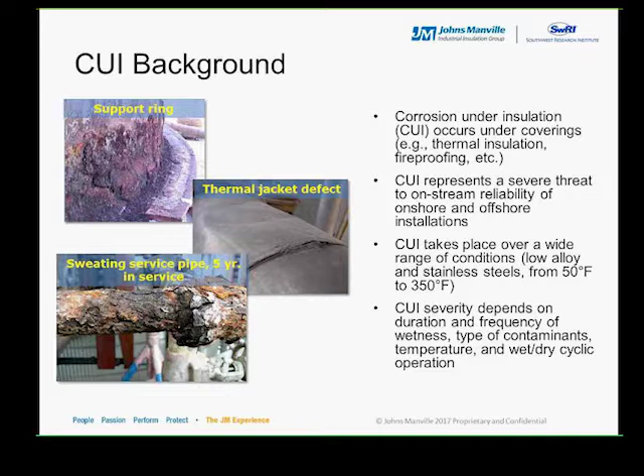Variables in CUI processes. There are a great number of variables associated with CUI processes. Examples of these variables include moisture, oxygen availability, metal temperature, type of CUI preventing coatings, and insulations. There can be various contaminants on the surface of the jacketing, and these contaminants can be picked up and carried into the insulation when water enters the system.

Chloride concentrations less than 10 parts per million are enough to cause stress corrosion cracking in stainless steel pipes operating above 140 degrees Fahrenheit. Pipes which operate at the range of CUI temperatures can have repeated cycles of condensation and re-evaporation, resulting in a more aggressive form of corrosion.

With these slides, I want to emphasize that the CUI scenario is pretty complex. The great number of variables may have a synergistic effect on the development of CUI. That is why CUI has to be viewed as a system approach, as mentioned in numerous standard practices and guidance documents.

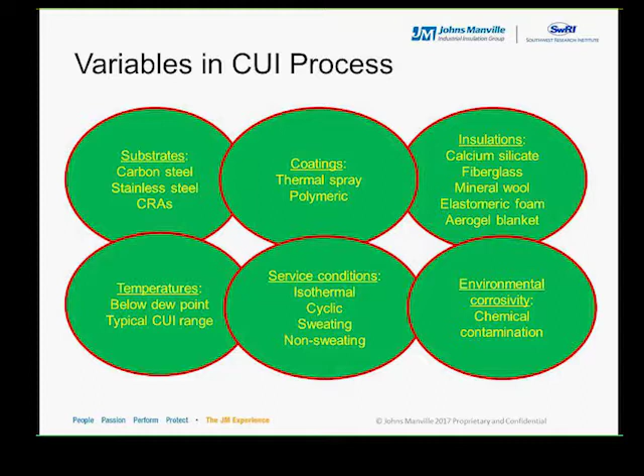The mechanism of CUI is initiated by the ingress of external solution into the thermal insulation, which traps the solution at the annular space between the metal surface and the insulation.

Just for the record, the true cause of CUI is due to long durations of contact with wet insulation, not just the lack of proper coating, for instance. We cannot rely on a coating to be the ultimate answer for CUI prevention. We have to rely on the knowledge that what really causes CUI is long-term water contact, so careful design and material selections are important in mitigating CUI.

Impact and cost of CUI.

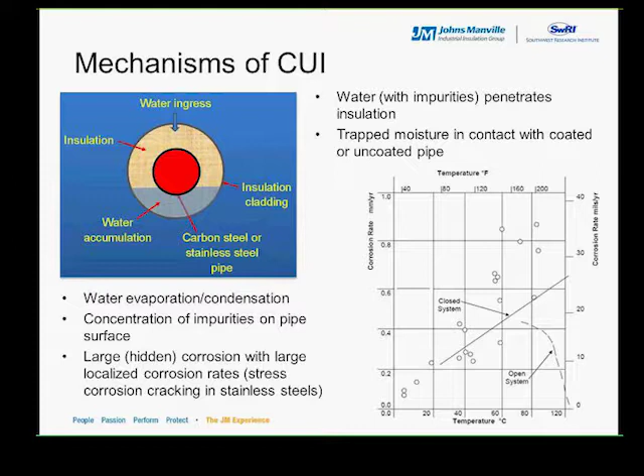A NACE study back in 2002 estimates that the annual cost of corrosion in production manufacturing in the United States to be around $17.6 billion, out of which 34%, or about $6 billion, is associated with the pulp and paper industries, and 40%, or $6.8 billion, is related to the oil and gas industries.

According to a study presented to the European Federation of Corrosion, the following conclusions were extracted from that investigation. The highest incidence of leaks in refining and chemical industries are due to CUI and not to process corrosion. Over 80% of most piping leaks occurs in diameter less than 4 inches.

Between 40 and 60% of piping maintenance costs are related to CUI, according to the Exxon study back in 2003. And last, CUI is associated with the most lengthy refinery downtimes.

As such, this type of corrosion can be serious problems and even catastrophic consequences in areas that are not normally of a primary concern to an inspection program, causing adverse economic losses in terms of downtime and repairs.

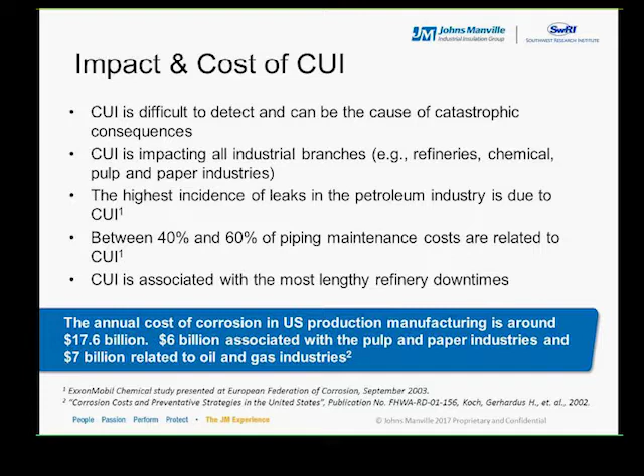Need for CUI testing.

The current standards related to CUI are either difficult to use or in many cases lack of relevancy. Coating and insulation vendors started to use internal test methods to evaluate CUI performance at elevated temperatures.

The main issue with those tests is that in some cases the test method is so aggressive that systems which have performed in the field for years suddenly look really bad in the lab and vice versa.

The NACE SP0198 document offers a true view of CUI mechanisms, as well as directions on coating systems and the limitations of certain coating technologies.

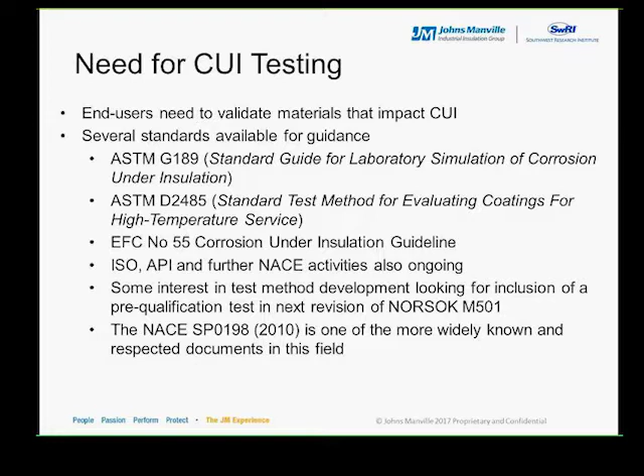Available CUI test protocols.

Experience has shown that performance-based qualification of coatings and insulations are more effective at raising performance rather than compositional standards.

The majority of the CUI test methods are not field validated, plus there are either some geometrical issues of the test specimens or temperature limitations, in addition to the lack of insulation in the tests. All that may pose real problems when it comes to mimic CUI in the laboratory.

Recently, ExxonMobil partnered with Southwest Research Institute to develop a test method to better assess CUI. The resulting test method reproduced field observations very well in terms of coating performance and corrosion rate of bare metals.

One of the main benefits of the test protocol is that it is not a pass-fail type approach. Instead, this test protocol is to be used as a means of establishing the relative performance of coatings and insulations given a set test criteria.

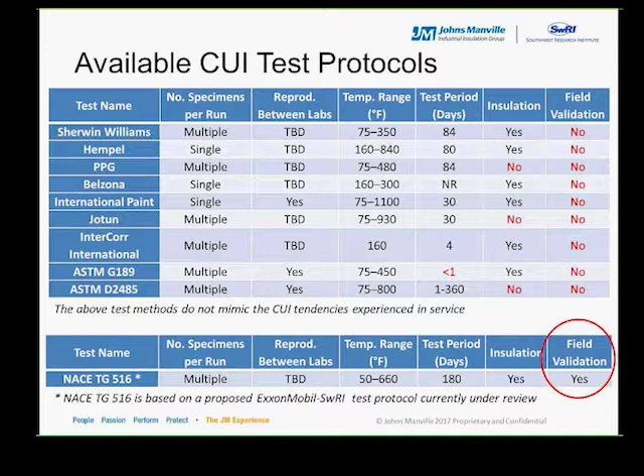The test method allows for various CUI environments that ranges from isothermal to cyclic operations. I will explain the developed test approach more in detail later on, and I will refer this test method as the NACE TG516.

Next, I'm going to address the NACE TG516 test protocol for CUI evaluation. The design of the test method is based on an approach that simulates CUI field conditions under any type of insulation material and coating type.

Another great benefit of this test method is that it allows for real-time electrochemical measurements that determine the corrosion rate of the metal, as well as the onset of coating degradation. This is very important in assessing the performance-based conditions of a system under evaluation.

The test duration is typically set to 26 weeks or until coating failures occur, whichever comes first.

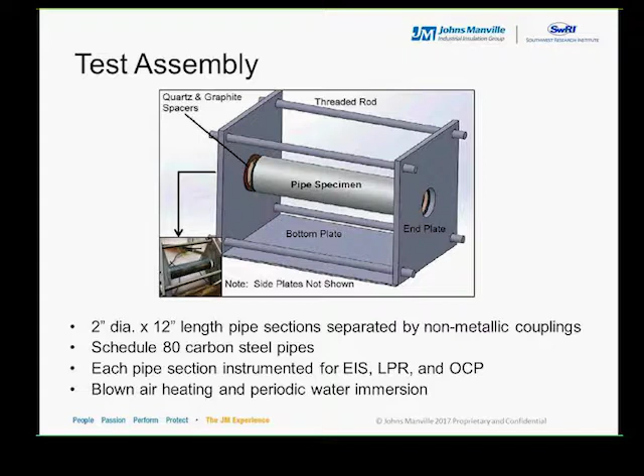Low temperature condition. For the low temperature condition, inline pipe spools interconnected with isolation couplings are used. The couplings are used to electrically isolate each of the pipe spools with the purpose of executing the electrochemical measurements. The gap between the couplings and the pipe surface are sealed with silicone to prevent water ingress inside the pipe.

Then the pipe spools are insulated with a given thermal insulation wrapped with a metal sheeting following field insulation practices. To attain low temperatures, cold air source is fed on the inside of the pipe using a vortex tube placed on the inlet of the pipe spool. A solenoid valve is installed upstream of the vortex tube to control the airflow.

Replacing the cold air by hot air at the source, this test setup can be used to model CUI in the temperature range between 50 degrees Fahrenheit up to 660 degrees Fahrenheit. During this setup, chlorides or other contaminants can be added to determine the effect of these contaminants. Wet-dry cycles are repeated for the duration of the test to accelerate the occurrence of CUI.

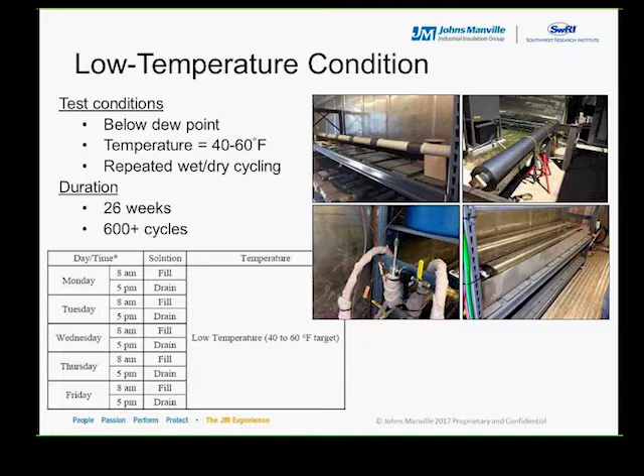Cyclic sweating condition. This test apparatus is designed for test temperatures ranging from 40 degrees Fahrenheit to 800 degrees Fahrenheit. This test method uses individual pipe spools that are placed in an individual vessel.

A thermal heater rod is placed inside along the inside diameter of the pipe spools to irradiate heat to the inner surface of the pipe spools. The heater rod is placed through connection ports to make sure that the heater is centrally located alongside the pipe.

Incoming air can be used instead of a heated rod, but there's a maximum temperature limit with the use of blown hot air inside. The measurement sequence, additions of contaminants, and time of exposures is comparable to that of the low temperature condition. Again, wet, dry, and hot-cold cycles are used to accelerate the occurrence of CUI.

For this test setup, the pipe spool is sandwiched between two metal plates using threaded rods. Quartz and graphite spacers are placed at both ends of the pipe to electrically isolate the pipe from the metal enclosure.

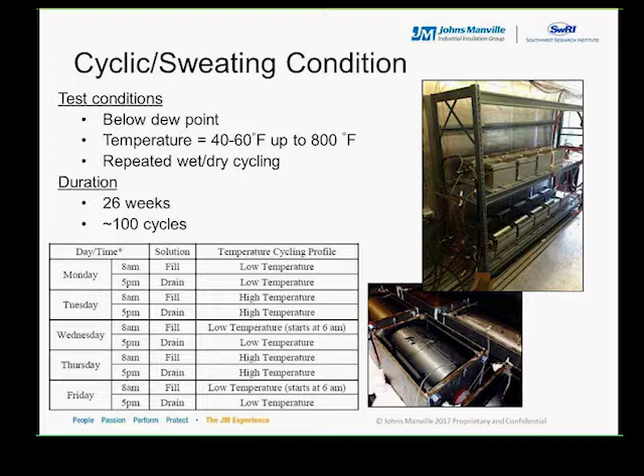Analysis techniques. For the in-situ electrochemical measurements, a reference electrode is placed outside the jacket in contact with the external solution. The metal jacket is used as a counter electrode. Typical electrochemical measurements include open circuit potentials, linear polarization resistance, and electrochemical impedance spectroscopy.

These techniques have been successful in tracking corrosion rates and coating integrity under insulation in real time. For the electrochemical impedance spectroscopy, equivalent circuits are used to model the physical behavior of the CUI process.

Other analysis methods are conducted after the removal of the insulation after a CUI exposure. Visual observation, ultrasonic measurements, and optical microscopy are used to determine the surface condition, and the result can be compared to those of the electrochemical measurements.

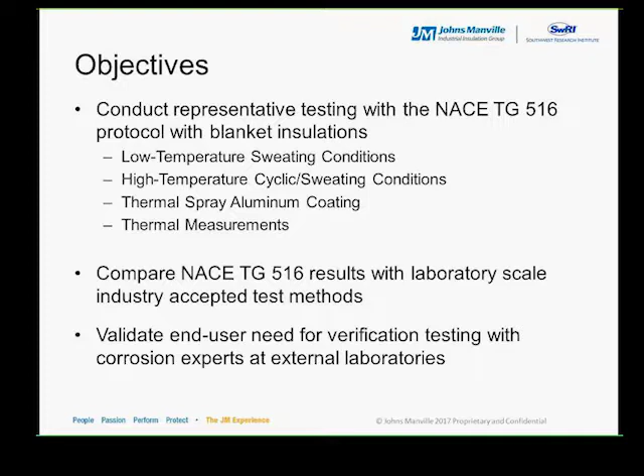Finally, the main objective is to really provide our customers and the industry the information they need to make decisions. Again, we want to provide our data so customers can actually use it and relate to it, and not just have it be another data point that may or may not be relevant to their application.

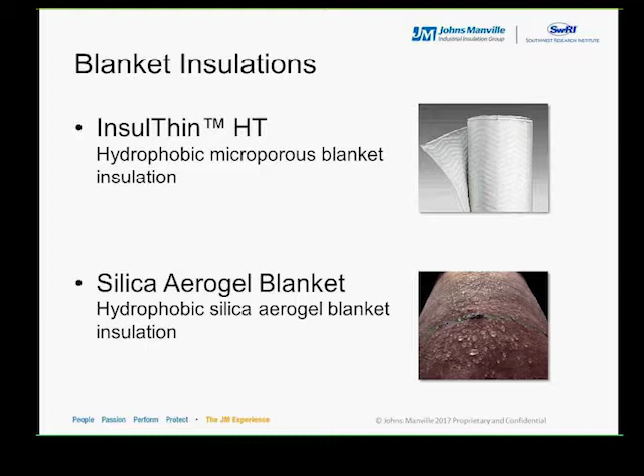So for the following study, we focused on two blanket insulations. First is a microporous blanket that JM launched in 2014, Insulthin HT, and the second is a silica aerogel blanket currently available in the market. Both are blankets and both are hydrophobic, so we and the people we consulted felt that these products were a good comparison for what was going to be JM's first study of this test protocol.

To begin, and so everybody's clear on the details of the conditions tested, the first set of data I'm going to talk about is what Leo referred to as the low temperature conditions. This profile kept the pipe between 40 and 60 degrees Fahrenheit during the entire 6-month test protocol.

In this manner, the insulation and assembly remained wet the entire time. Each day, the sample setups were filled with water in the morning and then drained at night. One thing that's really important to point out is that for the first 2 months, tap water was used to fill the chamber, as can be seen in the top right picture, and in the last 4 months, a 1500 ppm chloride solution was used to further accelerate the condition of corrosion under insulation.

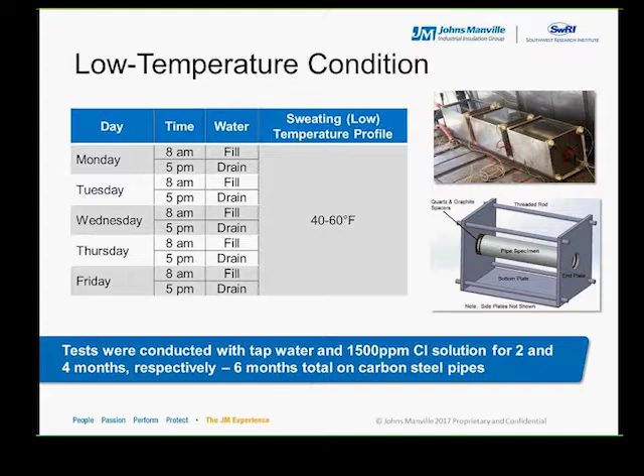This first slide shows results from the electrochemical method that Leo described earlier, under the low temperature sweating conditions. SwRI calculated the mean corrosion rates in situ throughout the 6-month timeframe for each insulation, and they're shown in the table on the bottom of the slide. The pictures taken by SwRI after the insulation was removed from the carbon steel specimens are also shown in the top portion of the slide.

The carbon steel pipe specimens were pressure washed to remove most of the corrosion byproducts, and you can see that both pipe sections look very similar with some corrosion-affected areas, but otherwise the sections look fairly uniform. Keep in mind that the pictures are representative of the carbon steel pipes after exposure to both the 2 months of tap water and the 4 months of 1500 ppm chloride.

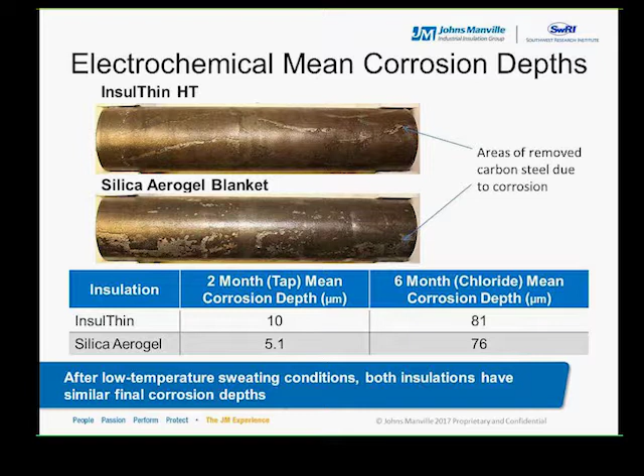So looking at the data table, the electrochemical test methods confirm that the mean corrosion depths for each insulation were very similar. Based on SwRI's historical data and expertise, the depths were statistically the same for both insulations at the two different time periods.

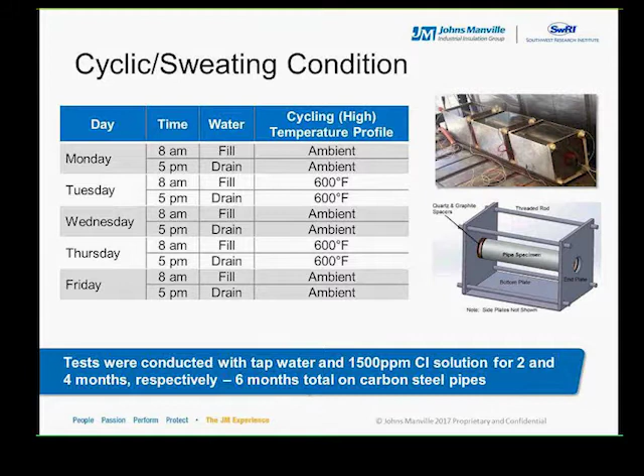Next we wanted to describe the impact of cyclic and sweating conditions on the two insulation assemblies: one with Insulthin and the other with the silica aerogel blanket. Here the same filling and draining of water was conducted, but now a 600-degree Fahrenheit condition was introduced. Each week, two cycles of high temperature conditions were exposed to the samples. So there were times when the assemblies were actually dry, unlike the sweating condition when it is wet the entire 6-month time frame. What we're mimicking with the cyclic test is repeated cycles of startups and shutdowns in field conditions.

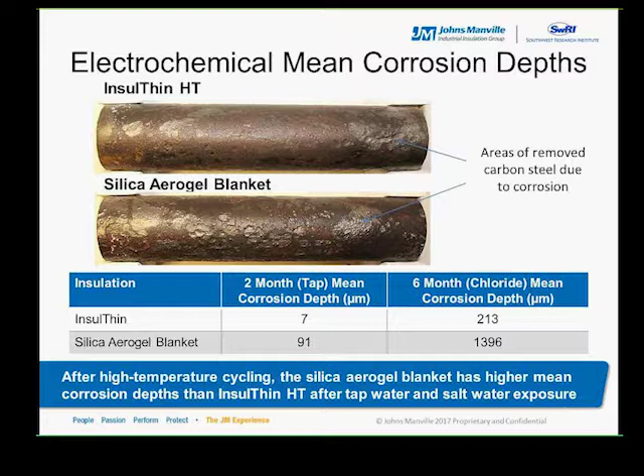If we look at the samples using the ultrasonic method, the same conclusions can be made, which is comforting since both methods show the same results. If we do the math again, in the third column we see that the maximum pitting depth of the Insulthin sample is lower than the silica aerogel blanket. What this means is that the Insulthin sample has more metal remaining after the test period.

Taking it a step further, this really shows that not only is the mean corrosion depth higher for the silica aerogel blanket, as calculated by the electrochemical method, but more importantly, the ultrasonic method can really see the presence of critical deep pitting that can lead to failures. It's really these localized pits that are the areas of most concern because they're harder to detect and usually where the failures occur.

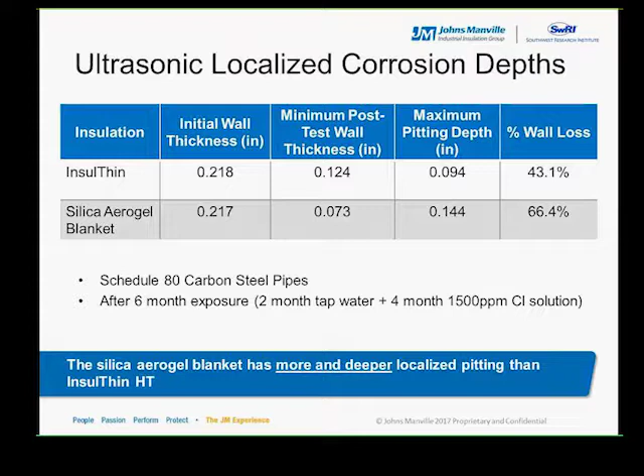SwRI also took some cross-sections and analyzed the pipe samples using optical microscopy. Again, the presence of deep corrosion pits was more evident in the silica aerogel blanket than the Insulthin HT. In the microscopy images on the slide, you can see the dark areas where the blue arrows point, showing the presence of pits in the pictures. Though both insulation samples show corrosion pits of varying depths, the silica aerogel blankets were clearly much deeper and wider than the Insulthin samples at the various points we looked at.

So this is the third piece of data that really confirms that the silica aerogel blanket has deeper pits at the accelerated sweating and cyclic high temperature conditions.

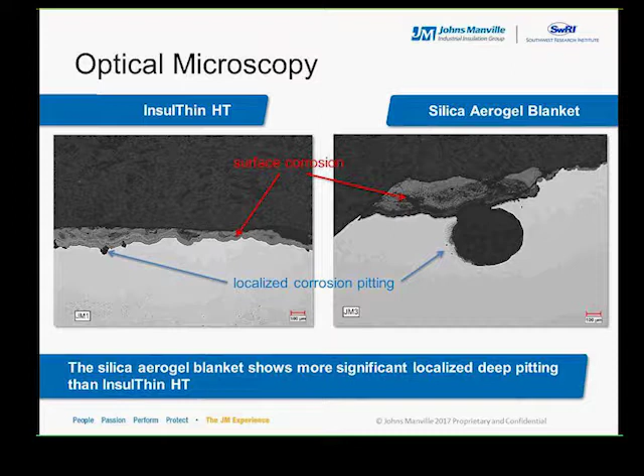The second objective of our study was to compare the results of the NACE TG516 test protocol with the accepted ASTM methods that we've used for evaluating corrosion in the past, in particular ASTM C665, which has been around for decades, and the newer C1617 test method that was developed and has been used over the last 5+ years.

The C665 test method is more qualitative in nature and compares the amount of corrosion using a visual inspection after sandwiching a piece of carbon steel between two insulation pieces and exposing it to about 90 degrees Fahrenheit and 90% humidity for 96 hours.

C1617, on the other hand, uses a quantitative process and compares the mass loss when a leachate solution made from the insulations is dripped onto a carbon steel coupon and dried repeatedly, again for about 96 hours.

Very encouragingly, the results of both ASTM test methods agree with what we've seen in the NACE TG516 protocol. The silica aerogel blanket has more visible corrosion products on the surface compared to the Insulthin HT sample using ASTM C665, and the mass loss corrosion rate in C1617 is 4 times higher in the silica aerogel blanket compared to the Insulthin.

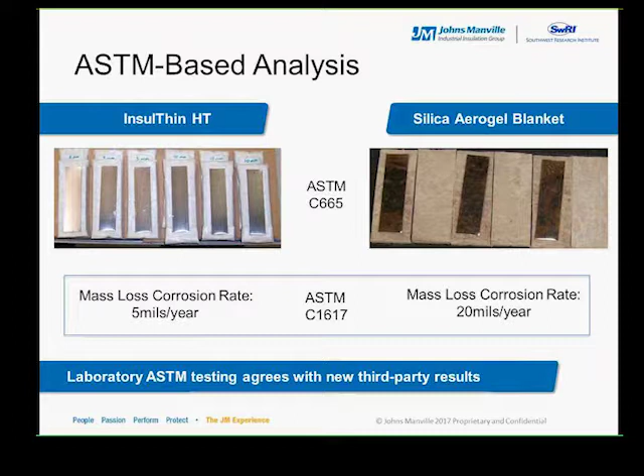The last corrosion-based analysis we conducted compared the impact of TSA, or thermal spray aluminum coatings, using the NACE TG516 test protocol. We only looked at this with Insulthin that was coated with TSA before installing the insulation, not the silica aerogel blanket.

In the bottom left-hand corner picture you can see a nice TSA coating on a section of pipe from a sample of the tested specimen.

The table shown in this slide is split to show results of both environmental conditions, the cold sweating and the hot cyclic. Also shown is a comparison between the mean corrosion depth with and without the TSA coating after both the 2-month exposure to tap water and the 4-month exposure to 1500 ppm chloride.

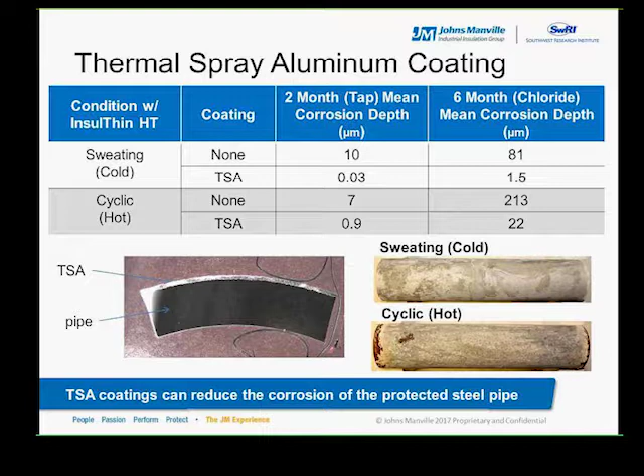In all conditions, the TSA decreases the mean corrosion depth by at least an order of magnitude, which isn't surprising since that's what TSA is supposed to do. But it's also an example of how this test method can be used to explore the impact of not only insulations, as we did earlier in the study, but also coatings in full insulation systems.

Switching now to the impact of real-world accelerated corrosion conditions on insulation thermal performance, we evaluated the thermal performance of both insulations at different times. You can see in this table that we looked at 1 week, 3 months, and 6 months. We did this by placing a thermocouple at the outside of the sheathing in the high temperature cyclic assembly and measuring the temperatures when the pipe was at its 600-degree time cycle.

Throughout the test period, the InsulThin blanket provides more insulating value compared to the silica aerogel blanket, which is expected based on the theoretical thermal conductivity values and test conditions as calculated by NAIMA's 3E Plus program, shown on the far right side of the table for each insulation blanket. However, the interesting thing is the silica aerogel blanket shows thermal degradation performance over time that's more accelerated than the InsulThin blanket.

For example, at the 1 week mark, the temperature difference is 19 degrees Fahrenheit between the two insulations: 177 for the aerogel and 158 for the InsulThin. But after the 6-month test period, the difference increased to 27 degrees Fahrenheit: 191 for the aerogel and 164 for the InsulThin.

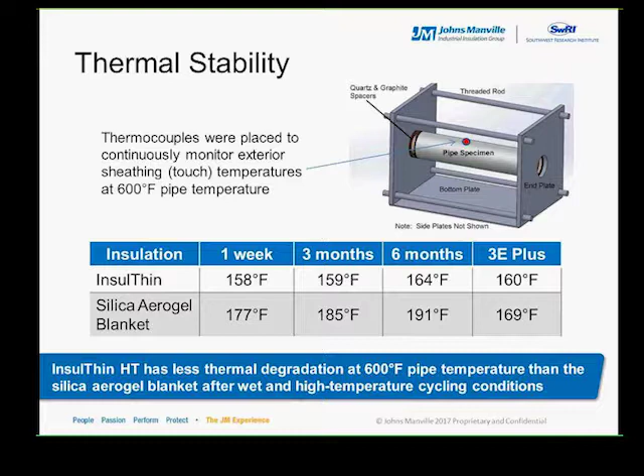In addition, the temperature difference between the actual and theoretical expected values increased for the aerogel from 8 degrees to 22 degrees over the 6-month timeframe, while the increase was only 4 degrees for the Insulthin HT.

To address some of the thermal degradation differences just presented between the two different blanket installations, we reviewed thermal conductivity data produced by a third party using ASTM C335, which uses a round geometry as opposed to flat. It's important to note that round geometry thermal conductivity data is much more representative for pipes, and this is what we used here compared to the flat thermal conductivity data.

The data shows that some of the thermal degradation seen in the previous slide can be partially explained by a thermal shift phenomenon we've seen with silica aerogel blankets, but not with micropore-based blankets like Insulthin. To briefly summarize, exposing silica aerogels to high temperatures results in degradation of the aerogel structure and therefore its thermal performance.

This can be seen in the difference between the two lines in the graph comparing the first and second cycles. The first cycle is data from virgin product not exposed to heat, and the second cycle is a repeat of the same material exposed to a mean temperature of about 700 degrees Fahrenheit. The first and second cycle lines are right on top of each other for the InsulThin, meaning temperature does not really affect thermal performance, but with the aerogel you can see 20 to 30% higher values on the second cycle compared to the first.

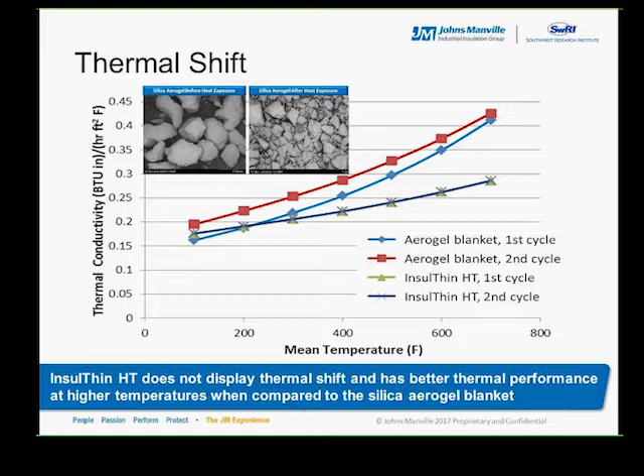So the thermal shift can explain part of the difference between the thermal test data shown in the previous slide, but we also know that the presence of water can affect the thermal performance to varying degrees of most insulation materials.

So to summarize, the conclusions from this third-party study completed by SwRI are the following. First, at low temperature sweating conditions, InsulThin HT and silica aerogels have similar corrosion rates and depths, and this was seen in both the electrochemical and ultrasonic test methods.

At high temperature cycling conditions, InsulThin has a lower corrosion rate and depth compared to silica aerogels, and more importantly, the silica aerogel causes deeper localized pitting, which is very significant from a failure analysis standpoint compared to uniform surface corrosion.

Third, our analysis of a TSA coating showed it can reduce the amount of corrosion, and that this NACE test method we just reviewed can be used not only for looking at insulation materials but also coatings.

Fourth, based on add-on testing we did to complete the understanding of the thermal performance of the two different insulations after corrosion, with accelerated corrosion conditions, we confirmed the presence of a thermal shift with the silica aerogel blanket, but not the InsulThin, at the wet and high temperature exposures.

And finally, from an insulation manufacturer standpoint, one of the important learnings for us from this study was the conclusion that there's pretty good correlation between the laboratory scale testing we've been doing on our data pages, the C1617 and C665, and the system testing we just described here in the NACE TG516. Even more critical, as Leo described, there's pretty good agreement between the NACE test method and field conditions as seen by ExxonMobil and the collaboration with them.

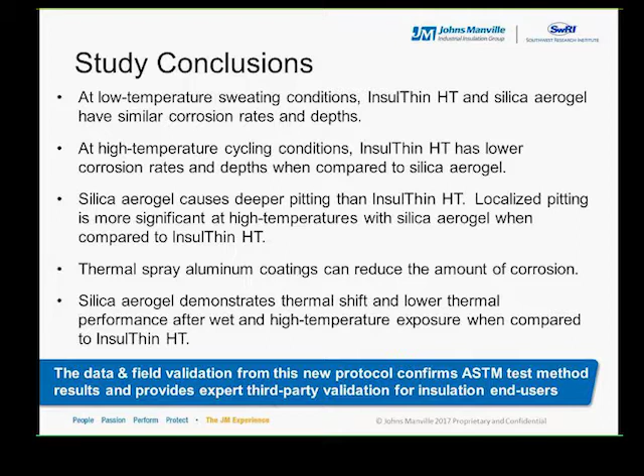So to conclude the presentation portion of the webinar, Leo will be speaking to some future programs at Southwest Research Institute and NACE. Leo? Thanks, Ames, for the technical background.

SwRI Joint Industry Program. I'm going to take advantage of this venue to let you know that we are assembling a joint industry program on corrosion under insulation. A JIP launch meeting was held in Houston on May 16th at the ExxonMobil campus. A total of 20 companies attended the meeting.

I'm going to list a few takeaways of the joint industry program that pertains to the operators and vendors, as well as service companies. From the operator's point of view, this joint industry program will provide guidance on better inspection intervals on CUI components, better selection of coating and insulation systems, limits of the operability of coatings and insulation, and the effect of the service environment on coating life and insulation type.

Now, from the coating and insulation manufacturer's point of view, this joint industry program will provide guidance on more accurate prediction of long-term performance of coatings and insulation, as well as support new coatings and insulation development. With that, we finish the technical background with the presentation and revert back to you, Kim, for a final wrap-up.

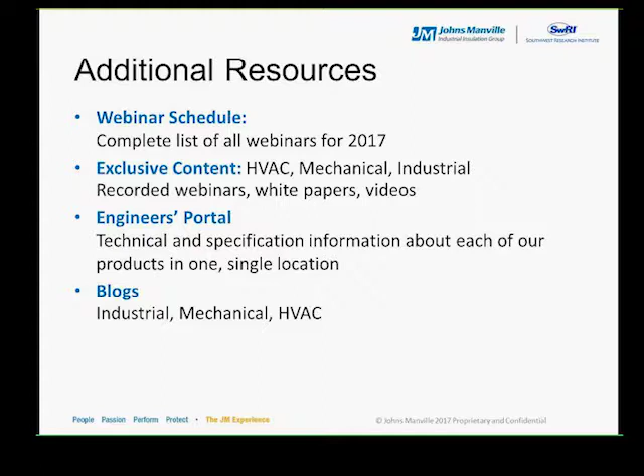As we conclude that, we'll go ahead and move on to our questions. The first question we got today is for Leo: can you define field validation and how this has been completed?

Thanks, Kim. Yes, the field validation was performed during the execution of the ExxonMobil programs, and ExxonMobil validated the results of the lab CUI investigation with field data that they collected. So the field validation was one big item in terms of validating the test methods that was developed as part of the ExxonMobil programs here at Southwest.

It looks like the next one is for you as well: have you tested any other insulating materials via this new test method?

I can comment on a few items that were part of the initial program. There were a lot of products that were part of the initial testing: mineral wool, cellular glass, PIR, several insulation materials, as well as TSA and numerous coatings that were provided for the initial development of the program. Those were selected by ExxonMobil as part of the program development.